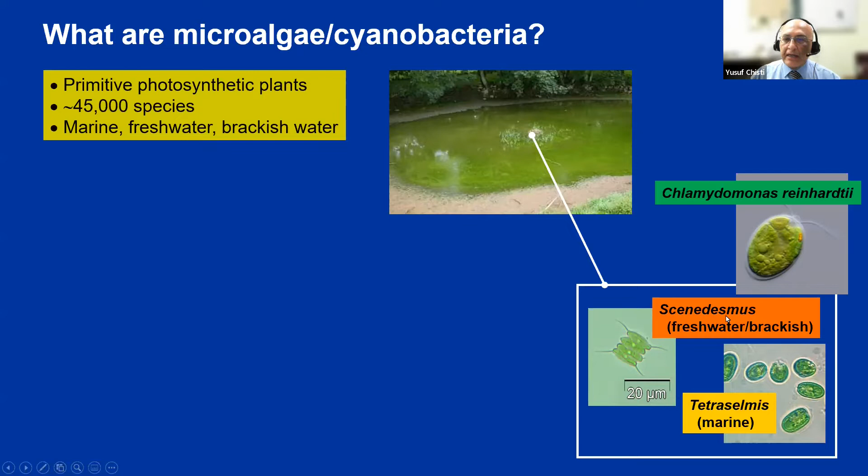What they would look like if you magnified them under a microscope, you could have species such as this. The order of size could be maybe 20 micrometers, an alga called Scenedesmus, or you could have even less, a quarter of this. So quite small organisms that can be different, many different kinds.

So these are the microalgae that we're going to use to treat our wastewater. Now, I'd like to point out that there is something else called macroalgae. These are large algae or seaweeds, large plants that are used in industrial processes and as food, very delicious foods actually. But this is not what I'm going to talk about because it's not used in wastewater treatment. We are talking about microalgae, distinct from macro, or seaweeds.

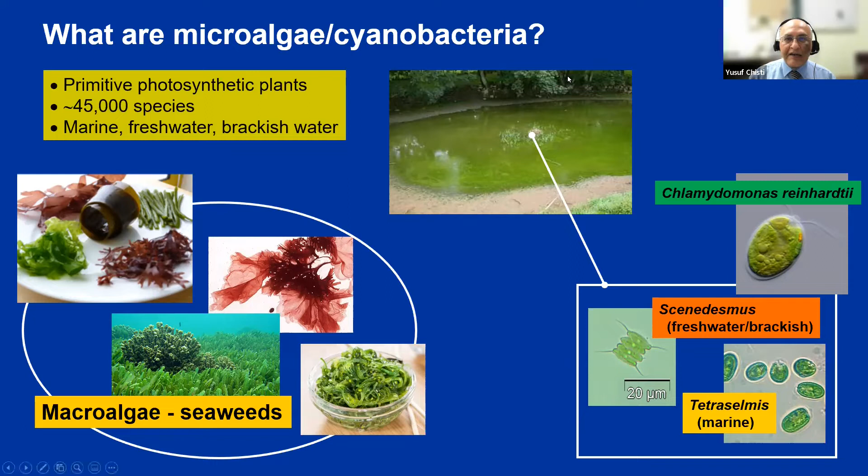Now, just as you see here, you have a pond in which the algae are growing. For use in treating wastewater with algae, you'll need some kind of pond system, typically like this. You have a pond which is quite shallow, a whole bunch of ponds shown here. These ponds are very shallow, and laid out over a large area, meaning they have a high surface area to volume ratio. We'll look at some of the specific numbers.

The reason they have to have a high surface area is that this treatment process is driven by sunlight, and absorption of sunlight depends on the surface area available to you. These ponds are known as raceway ponds because they're shaped like a racetrack, a horse racetrack if you like. Or they are also known as high rate algal ponds, HRAP, high rate because the rate of oxidation of the organic matter in these ponds tends to be rather high. They're also known as Oswald ponds, after the inventor William J. Oswald. They were first invented in the 1960s.

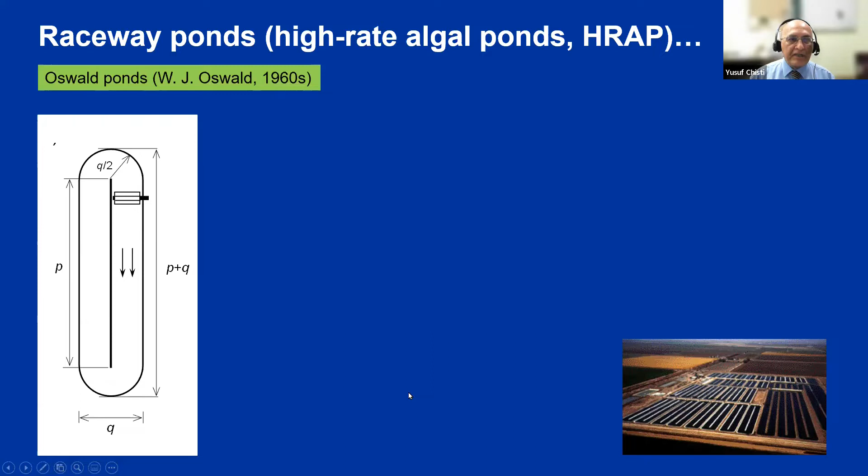The pond could have a shape like this, or it could have a somewhat different configuration such as this. It's the same pond. You have a paddle wheel that rotates continuously, driving the liquid wastewater to flow around. You have the same continuous loop, the paddle wheel driving the flow, and these are baffles to direct the flow right around this channel and back to the start of the paddle wheel. Your wastewater, the feed, enters here somewhere in front of the paddle wheel, and after the entire loop is complete, your treated water is taken out here as the harvest.

The depth of these ponds is very small, only 25 to 30 centimeters, quite shallow, because sunlight doesn't penetrate too deep in this green liquid, so there's no point having a deeper pond than 25 centimeters. They have a high surface to volume ratio, much higher than you'd find in conventional treatment processes, because you're trying to maximize the area to capture sunlight, which drives the photosynthesis carried out by the algae. We'll see why we require that.

A single pond, either of this kind or this, would have an area of up to 2.5 hectares, which is quite large, but more commonly the area is around 0.5 hectares. This configuration shown here corresponds to something similar to this. So this is what an algae treatment pond looks like.

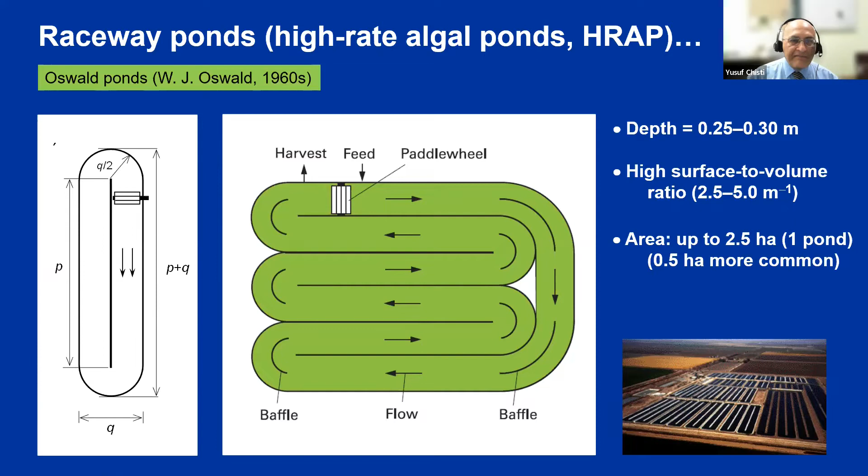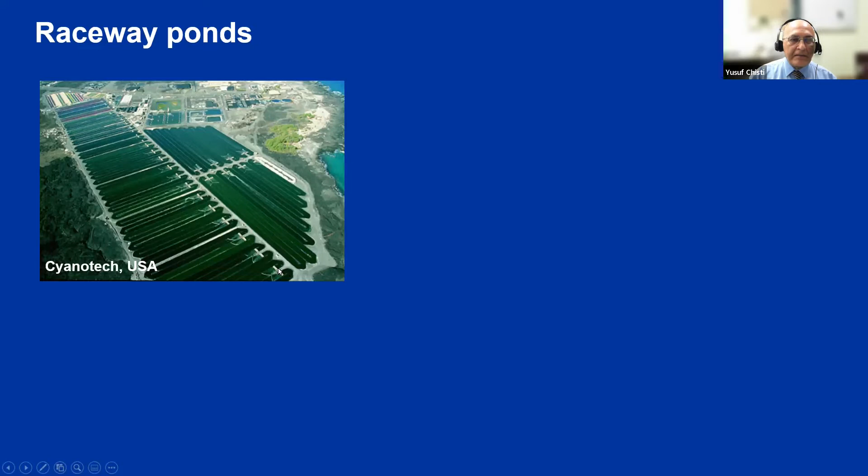Now let's have a look at how some of these might appear in practice. We'll see raceway ponds of this configuration, quite shallow, 25 to 30 centimeters deep. Each pond has a paddle wheel, and this is a whole line of paddle wheels here. If I magnify this, the paddle wheel makes the fluid, the wastewater, circulate. The algae may have a green color, or at some stages of their life, certain algae would acquire a different color, red for example. The paddle wheel runs continuously day and night, 24 hour operation, so that you have sufficient velocity in this channel to keep the algae suspended.

Algal cells must always be suspended, and the suspension velocity must be such that cells are brought to the surface from the deeper parts of the pool frequently, because the surface is where light is captured. The maximum biomass concentration attainable in this pond at steady state would be of order 0.5 kilogram per cubic meter, so 0.5 gram per liter. Very dilute, even though it looks dark green, the culture is actually very dilute.

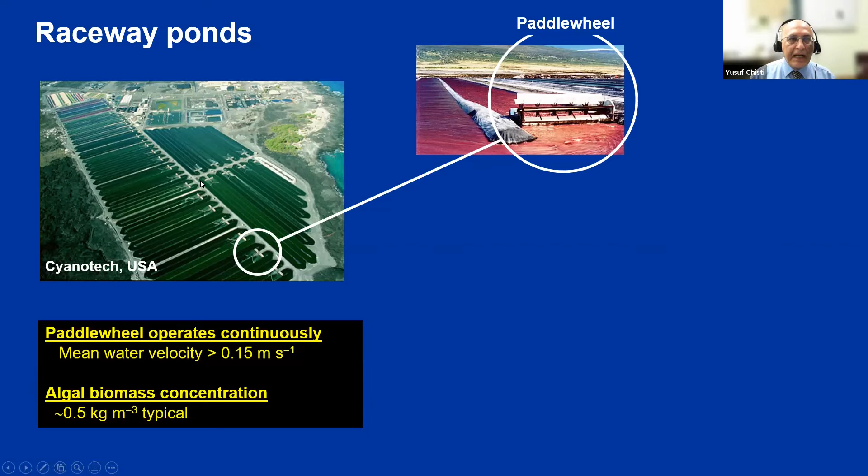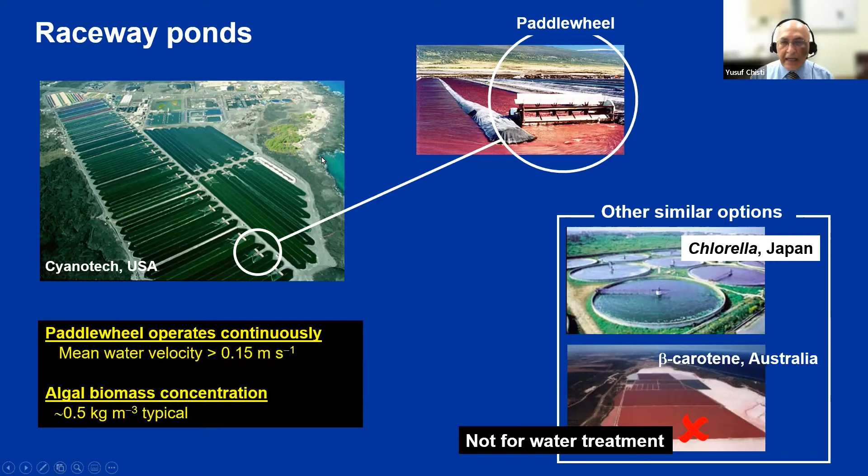Let's now see how an algae-based water treatment facility might look. Generally, the layout of the facility would be something like this. Prior to the algae pond, you have an anaerobic pond that I'll not go into. The anaerobic pond is quite deep, 4 to 5 meters deep, and would have a residence time.

The water entering, the water leaving, the residence time in the pond would be of order 85 to 120 days, so quite a long residence time. The purpose of this pond is simply to sediment all the suspended material that must be removed prior to the wastewater entering the pond.

So the wastewater that enters the algae pond needs to be clear, almost clear, because any suspended solids would interfere with penetration of sunlight into the liquid. That's a limitation we have to live with: the water must be more or less clear before it enters the algae treatment pond.

The BOD loading, BOD5, biochemical oxygen demand, a measure of organic carbon content in the water, can be of the order of 100 to 400 kilogram BOD per hectare of pond area per day. So the treatment can be quite heavily loaded, and the residence time in this pond tends to be only 7 to 11 days, unlike the 85 to 120 days in the anaerobic pond.

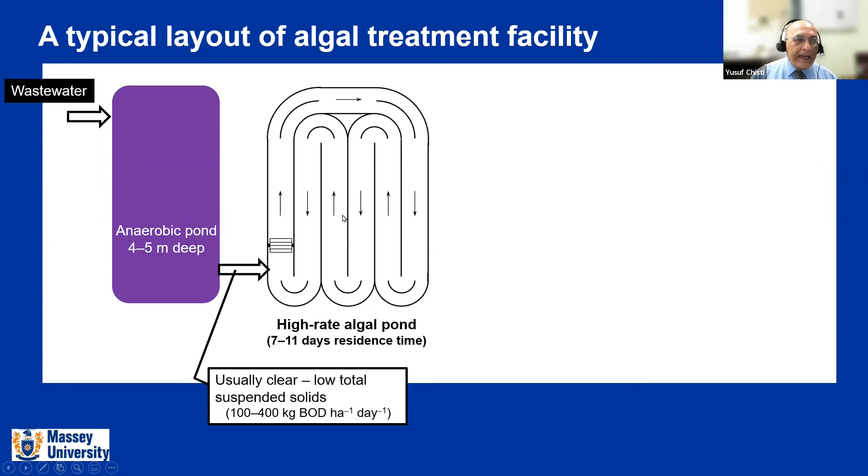So this is what we are concerned about, this is what we'll focus on. Once you have had a residence time of 7 to 11 days, the next component of the process is shown here: you have the algal slurry, algal suspension leaving. This contains the treated wastewater plus the algae cells, a green suspension. You somehow need to remove the algae.

How you do that typically is you have a mixing tank in which you add a flocculant, usually aluminum sulfate. You mix the suspension with the flocculant quite rapidly, dispersing it in the fluid, then go into a second tank where there is gentle mixing. It's important to have gentle mixing, and we'll explain how this flocculation process works.

Once the algae cells have been flocculated, they go into a settling vessel or sedimentation tank where the algae flocs settle and the clear water is taken out. This algae slurry is a concentrated slurry of algae, but quite liquidy. This goes to a filtration or centrifugation process in which more water is removed and we are left with algal paste. So the outcome is two valuable streams.

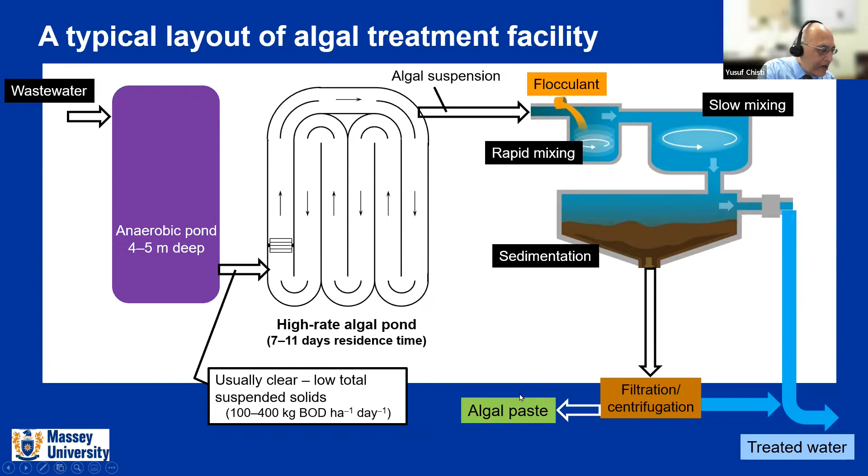Of course, you have the treated water, which is your primary objective, but you also have a lot of algal paste, which is important for this process because it's an important economic contribution. Let's look at how exactly the process in this pond works: how is the biological waste degraded?

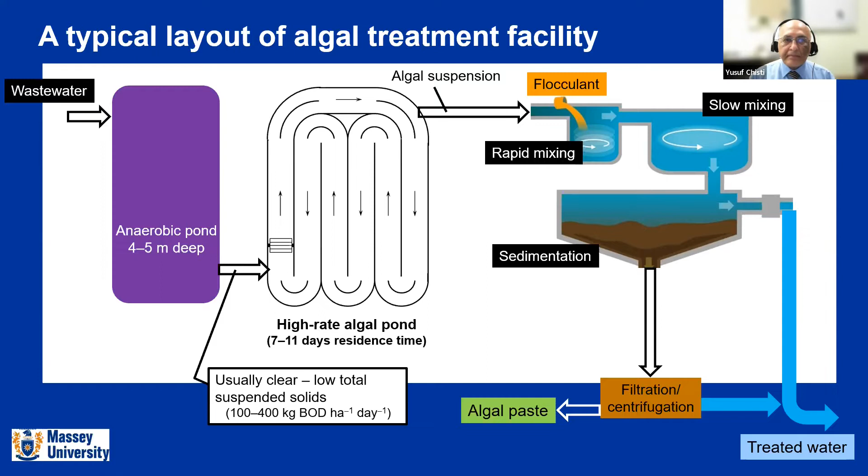So the treatment is actually carried out by a mixed culture, a consortium of algae and bacteria. People often forget to talk about bacteria, but bacteria are present in the pond, and these two interact together in order to achieve the treatment.

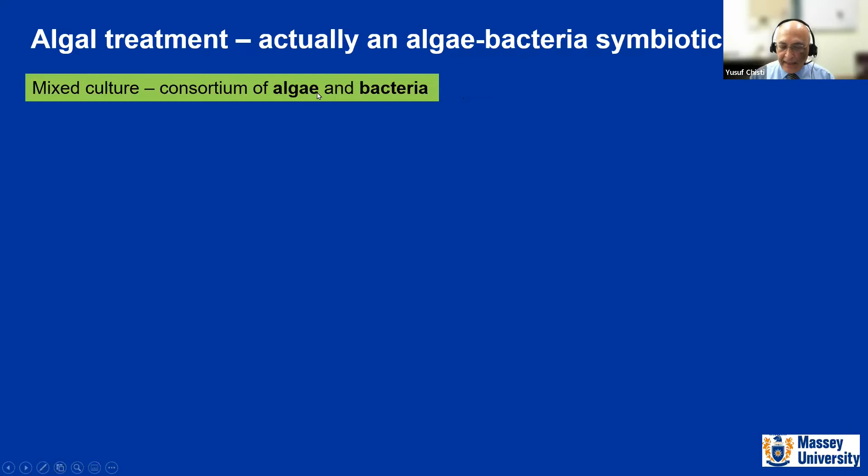So if we look at this algae pond, this is the wastewater going in, with the chemical oxygen demand, COD, organic matter, nitrogen, and phosphorus. This is our pond. It contains microalgae and bacteria. What actually happens is the organic matter, COD, is oxidized by bacteria

using oxygen that is produced within this pond by photosynthesis by microalgae. So unlike conventional activated sludge process where you bubble a lot of oxygen, you don't provide any oxygen here, all the oxygen in the pond is generated in situ by microalgae. This oxygen is used by bacteria to oxidize COD to produce carbon dioxide. This carbon dioxide is used by algae.

Photosynthesis requires carbon dioxide, nitrogen, phosphorus that the algae absorb. And of course, it requires sunlight to produce oxygen. So this is how the process works. Of course,

this process, sunlight is there only during daytime. So oxygen production can occur only during daytime. So this operation, degradation using a combination of algae and bacteria, works only during sunlight. So algae use carbon dioxide and sunlight to produce oxygen by photosynthesis.

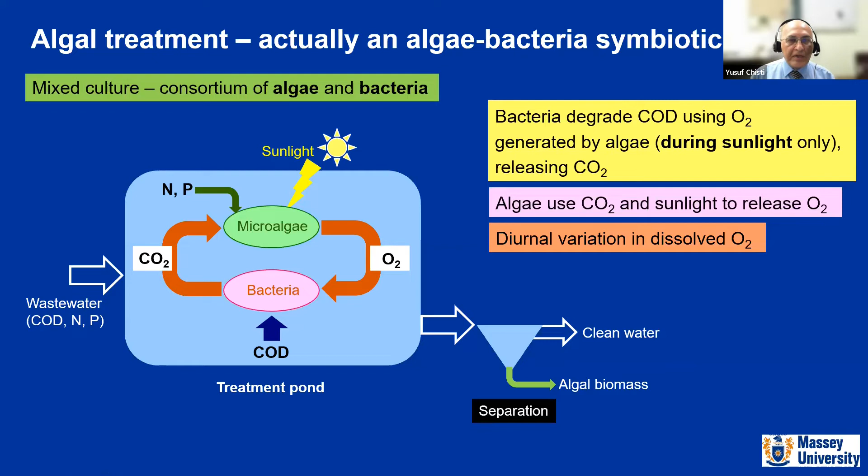During night, bacteria keep producing carbon dioxide, although they don't have oxygen. We'll see that derives oxygen from a different source, and the pond tends to become acidic. So of course, in such a large pond, you cannot control pH, and we don't control it, but there is a pH variation, and it's important to recognize this because it has important implications.

So if we plot the pH of the pond water against time, at sunrise, the pH is around 8. At solar noon, when there's a lot of sunlight, the photosynthesis is occurring rapidly. Carbon dioxide is being consumed. Carbon dioxide produced by bacteria is consumed by the algae. Concentration of carbon dioxide in the pond declines and the pH rises. It could rise to as high as 9 or even higher, 10.

So this pH change occurs, and there are two mechanisms for it. One is, of course, your bicarbonate and H plus hydronium ion combine to give you carbonic acid that splits into carbon dioxide and water. Carbon dioxide is consumed by the algae, so that results in a net consumption of H plus and alkalinity increasing. And this mechanism tends to dominate at pH around 8 or less than 8, early in the morning, late at night, late in the evening.

There is a second mechanism that also operates in relation to pH, and that is your HCO3 bicarbonate being split into carbon dioxide and alkali. So this CO2 is consumed by the algae during daytime, and OH concentration increases, therefore the pH increases. This mechanism tends to dominate at higher pH values, greater than 10. Both mechanisms operate, but which is dominant varies with the pH situation. And this effect is important for treatment, and we'll see how it helps with the treatment.

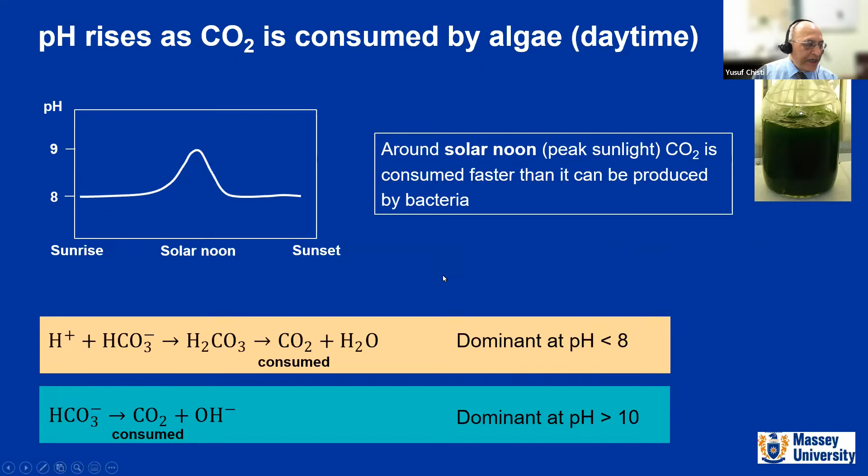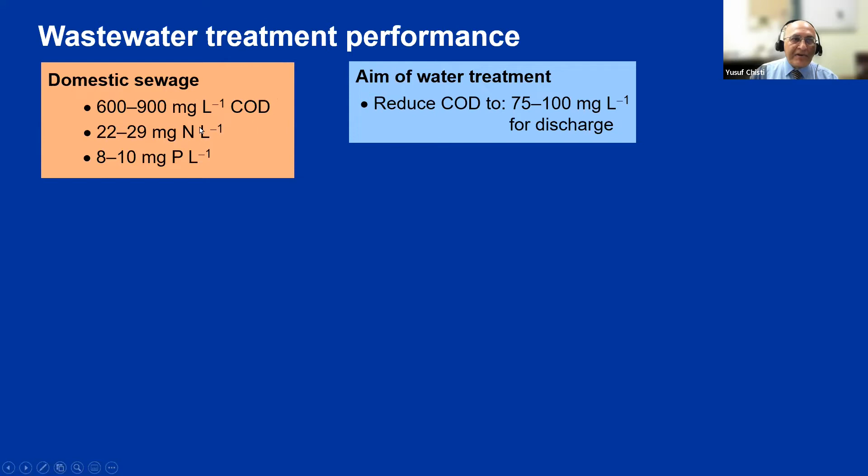The aim of the treatment, whenever you're treating domestic sewage, your primary aim is to reduce chemical oxygen demand from around 600 to 900 to maybe 75 to 100 milligrams per liter. At this point, this water is ready to be discharged to a natural environment. So the purpose of the treatment is to change primarily the COD level from this level to that level.

Let us see how effective the algal process is in achieving these aims. So algal treatment will remove COD from this level by 90%. That means if you remove 90% of the COD, you will come down to this level of chemical oxygen demand remaining. That means you're able to treat wastewater using an algal pond in terms of your objective of reducing COD. That can be done, no problem.

The algal process also removes nitrogen and phosphorus. How much is removed depends on the operating conditions. Operating conditions, we can't really control too much.

Operating conditions mean the temperature, and temperature is what it is out there. So in a warmer climate, removal rate would be different than in a colder climate. It also depends on the sunlight level, because sunlight levels are different in different geographical regions, whether you are at the equator or further away from it.

Overall though, in general, you'll be able to remove 80 to 90% of nitrogen present in the wastewater. It's important to understand that around 45% of the nitrogen removal is not due to algae, but due to stripping of nitrogen from the surface of the pond. We'll see how exactly this mechanism works, but just remember that around 45% nitrogen is removed by stripping.

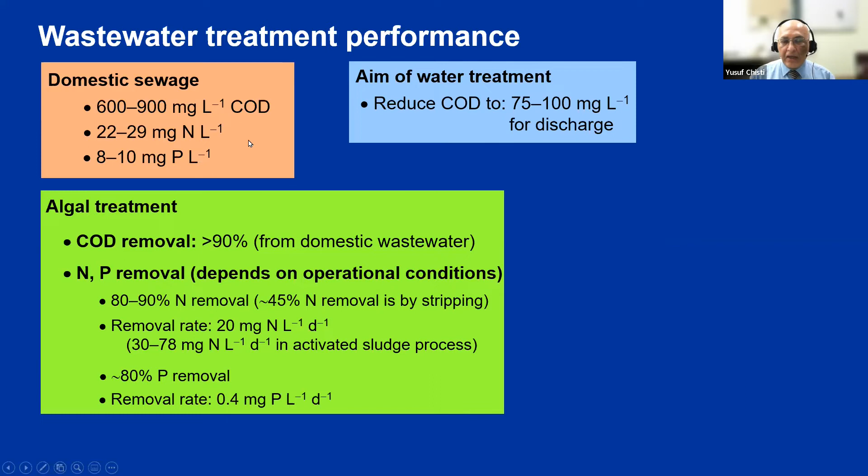Another important aspect of treatment is that from domestic sewage, you want to remove pathogenic bacteria, E. coli for example, or coliform bacteria as we call them. How effective is the algae process in removing coliform? 90 to 99% of the coliform in the clarified sewage would be removed by the algae process.

The mechanism is that in the pond during daytime, there's high oxygen. High oxygen in combination with high sunlight level tends to create oxidizing radicals that damage these coliform bacteria. Also, during midday, pH tends to be high, 9 to 10, and many coliforms are susceptible to pH, so they'll be destroyed by the alkaline pH. These are the mechanisms responsible for removal of coliforms.

Now let's see how nitrogen removal by stripping works. 55% of nitrogen is removed by algae, but the rest is removed by stripping. What exactly is this?

One thing to note is that the wastewater you're using must be free of toxins and heavy metals. If you have toxins or heavy metals in the wastewater, then the algae biomass produced cannot be used; the only thing you could do with it is use it as landfill. So your water must be clean of toxics and heavy metals so that the algae produced can actually be put to proper use.

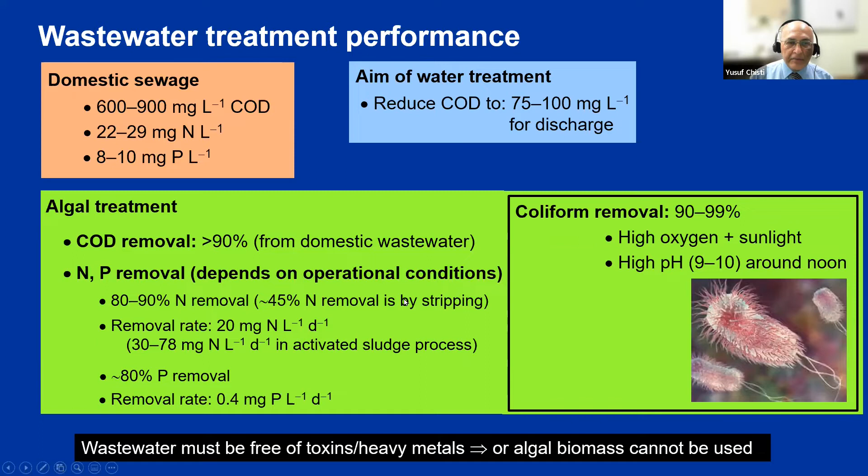Okay, let's go on to see how nitrogen is removed by stripping. There are two mechanisms of nitrogen removal by stripping. One is that in water, nitrogen, when it's in the form of ammonium, is actually in equilibrium between ammonium form and ammonia, NH3. Depending on pH, say pH 9, 24 degrees Celsius under common operating conditions, 35% of the nitrogen will be unionized, so it'll be in this form.

If the pH is higher, at 10, nearly 84% of the total nitrogen would be in this unionized form. So depending on pH, the more alkaline it is, the more of the nitrogen will be in this form, and that will tend to volatilize or evaporate from the surface of the pond.

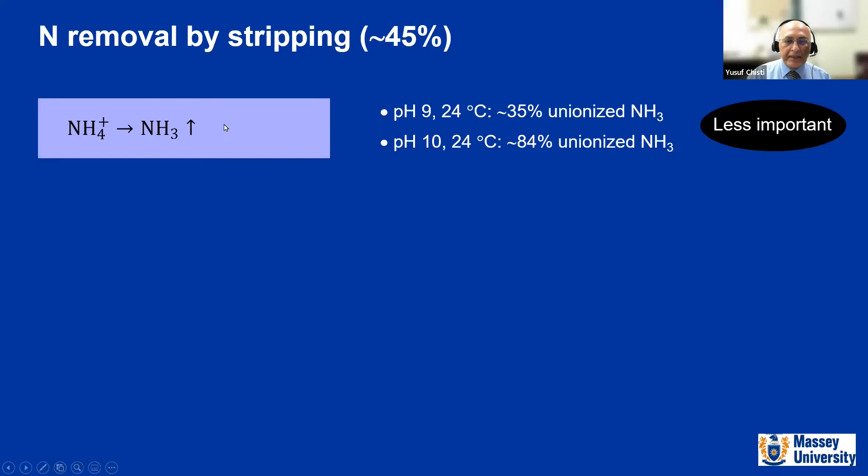So part of the nitrogen removal is due to this mechanism, although this mechanism is not very important. There is a second mechanism that is much more important.

And that is denitrification. You see, during the day, the conditions in the pond are aerobic, highly oxygen rich. But during night, there's no production of oxygen. The conditions become anaerobic at night, and that's when the denitrification occurs.

Most of the nitrogen present at the end of the day is in the form of nitrate. This nitrate contains oxygen. Bacteria extract this oxygen, converting nitrate to nitrite, and extract this oxygen, converting nitrite to nitrogen. This nitrogen leaves through the surface of the pond. So at night, because bacteria don't have access to oxygen, they use oxygen in nitrate and nitrite to oxidize the organic matter. This is how nearly 45% of nitrogen is removed from the water.

Now, in the field, we can't do many experiments because they are very difficult to do. So we do a lot of experimental work on algal ponds in the lab. In our labs, the ponds look like this. This is a raceway pond. It's also 30 centimeters deep, just as a full-scale raceway pond. It has a paddle wheel the same size as in a typical raceway pond, same diameter.

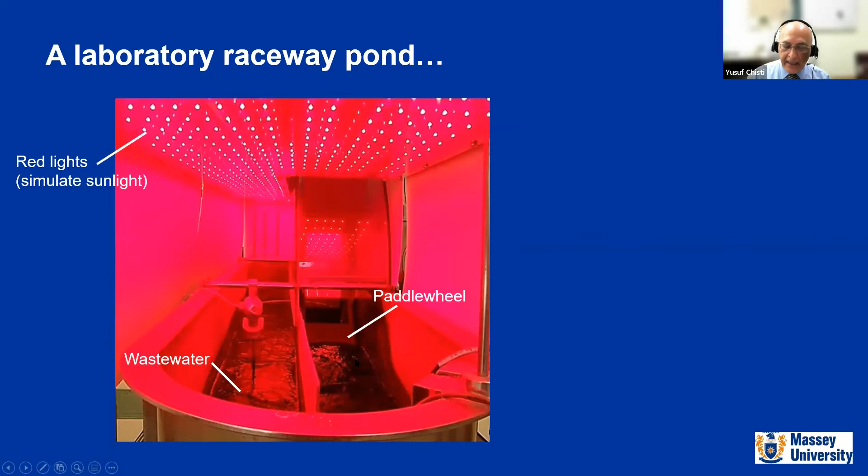Of course, this wastewater will have to be inoculated with some algae to start the process, and we grow the algae in small culture bottles. This becomes our seed, which is added to the water to provide the algae.

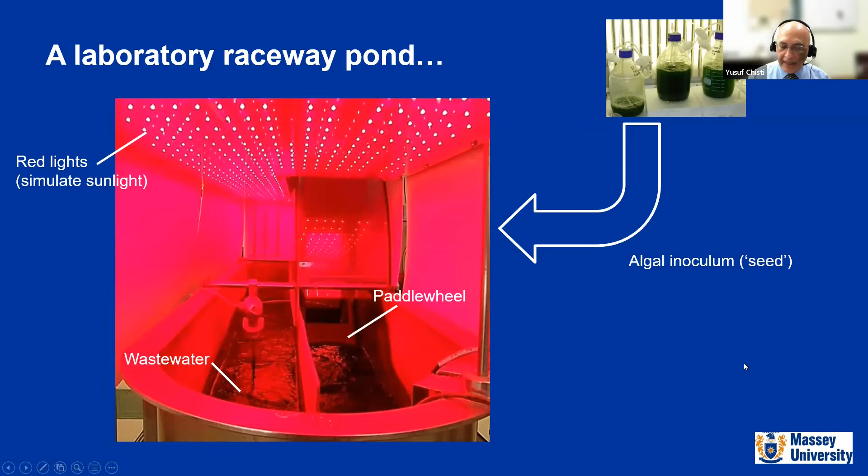Now let's compare algal treatment with the conventional activated sludge wastewater treatment process. The conventional process you're of course quite familiar with. It's well established. That's how municipal wastewater is treated all over the world, by the activated sludge process.

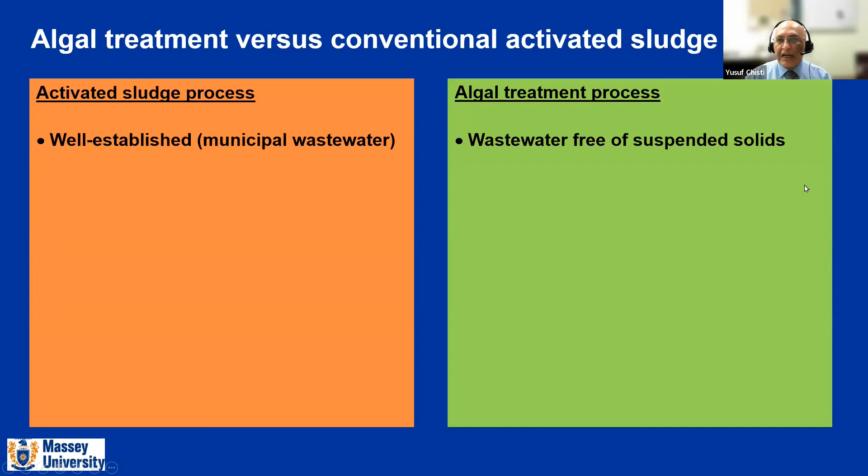In the algae process, the water needs to be free of suspended solids, as I explained, because they interfere with penetration of light in the algal pond. The thing with the activated sludge process, and that's its disadvantage, is that it's very energy intensive. It requires a lot of energy to provide aeration and mixing. In fact, 50% of the total cost of treating water by activated sludge process is actually the cost of energy, providing aeration and oxygen. In the algae process, sunlight and the algae provide the oxygen, so this cost is minimized.

With activated sludge, most of the nitrogen and phosphorus remains in the effluent unless you use tertiary treatment. Here, our energy cost is much lower, 50% of the cost, and that's the main advantage of reducing the cost of treatment.

The other thing, of course, is that for an algae operation, the wastewater must contain carbon, nitrogen, phosphorus in a certain ratio, which generally is what happens. So if the wastewater is short of carbon, you'll need to provide carbon dioxide. Generally we don't need to do that, but this is something to keep in mind. If you don't have sufficient carbon, your nitrogen and phosphorus will not be removed completely, because there isn't sufficient carbon to grow the algae biomass.

We have seen that some of the nitrogen is removed by volatilization, and some goes and is captured by the algae biomass, and all phosphorus is captured by the algae biomass as well. If you have too much nitrogen, you cannot remove it unless you also provide phosphorus, because there has to be a certain nitrogen-to-phosphorus ratio, and that's the ratio you get in the algae biomass.

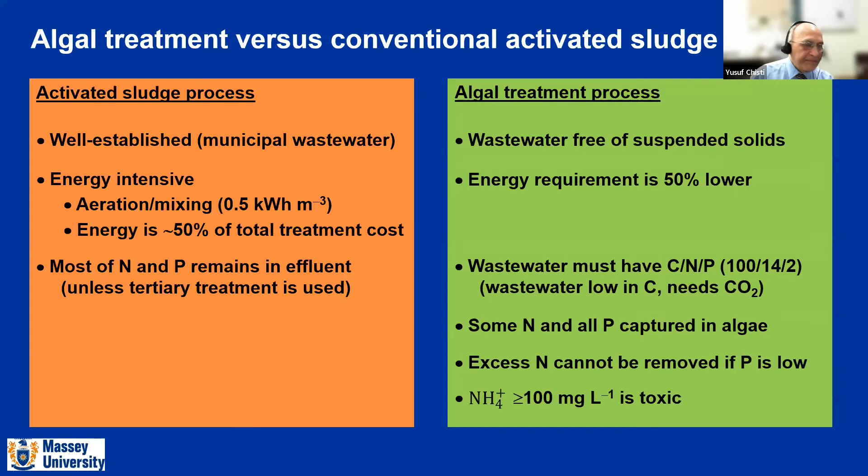Another important consideration: for the activated sludge conventional process, a facility around 1 hectare in area is sufficient to treat effluent from a fairly decent sized town, say 40,000 people population. Now, if you were to treat effluent from the same number of people using the algae process, you'd require 30 hectares, which is completely unrealistic.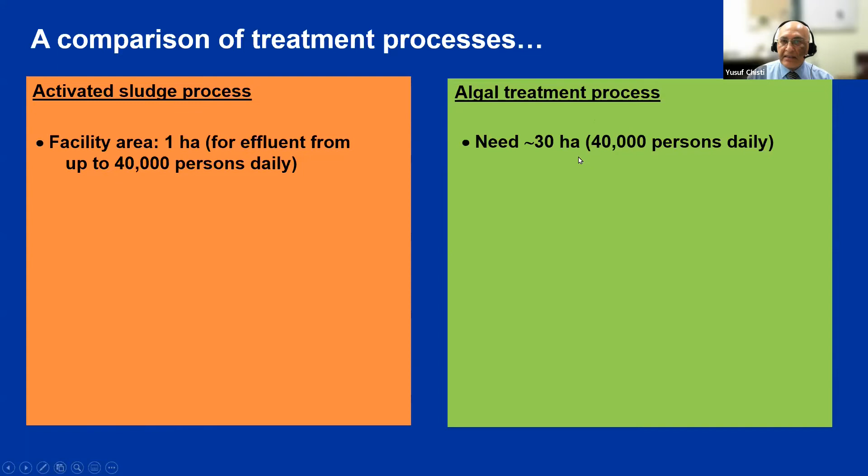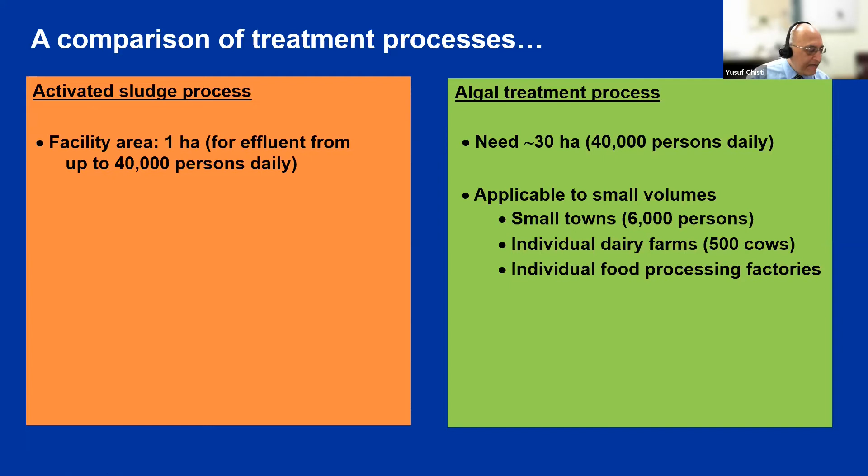So that means that algae process is applicable only to small towns, maybe 6,000 persons would be the limit. It's applicable to individual facilities, such as an individual dairy farm with maybe 500 to 1,000 cows - you could treat the effluent from this using an algae treatment process. You could treat effluent from individual food processing factories, etc. So there's a limitation to size.

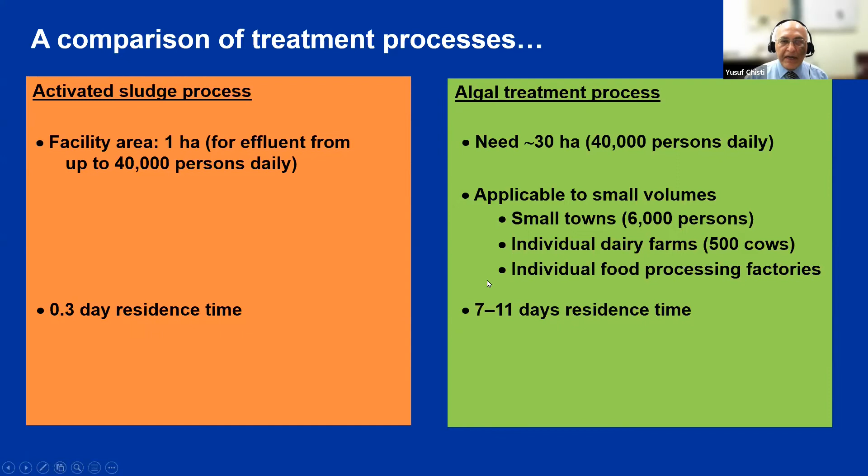Here, the residence time is very short. Activated sludge process, 0.3 days. In algal treatment, you require a longer residence time. And the outcomes, of course, are different.

You have treated wastewater in both cases. Here you have a lot of nitrogen and phosphorus remaining unless you use tertiary treatment. Here, most of the nitrogen and phosphorus would be removed by the algal biomass. In addition to the treated wastewater, your product is algal biomass, and this is an important product. Here, the product is activated sludge that you can only use more or less to produce methane, which is a low-value product by anaerobic digestion.

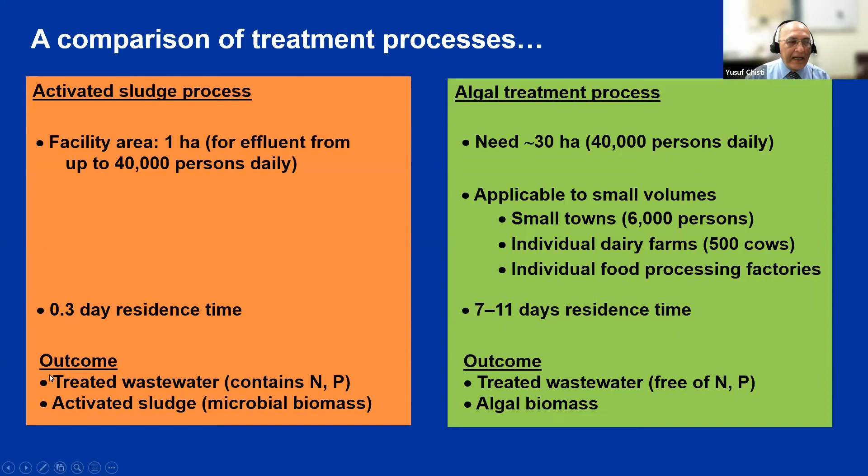So while these are the comparison differences, once you have grown the algae, you must separate the green cells from the water, and that's typically done by flocculation, which is a two-three step process. In the first step, you take the algal broth coming out of your raceway pond, you add the flocculant, mix it rapidly, then continue mixing, but gently.

It's important to see the differentiation. Gentle mixing allows the algae flocs to contact with each other, but the mixing is not so intense as to break the flocs apart. So this gentle mixing is important to increase floc size.

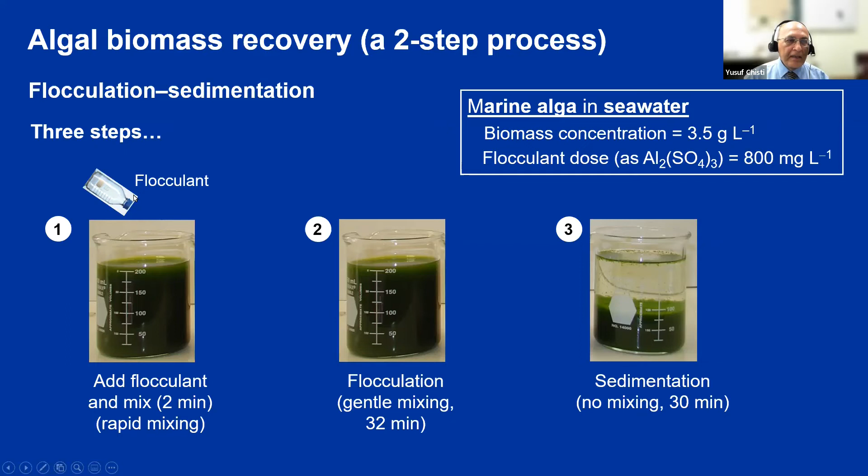Once you have done that for a certain amount of time, 32 minutes in this case, you stop mixing completely, and you let the algae flocs settle - they'll settle like this in about 30 minutes. So you've gone from there to there. Here, they will never settle, they will just stay like that. The point is that this slurry has a lot of water, quite a lot of water, and will require further treatment to remove this water, and we'll see that.

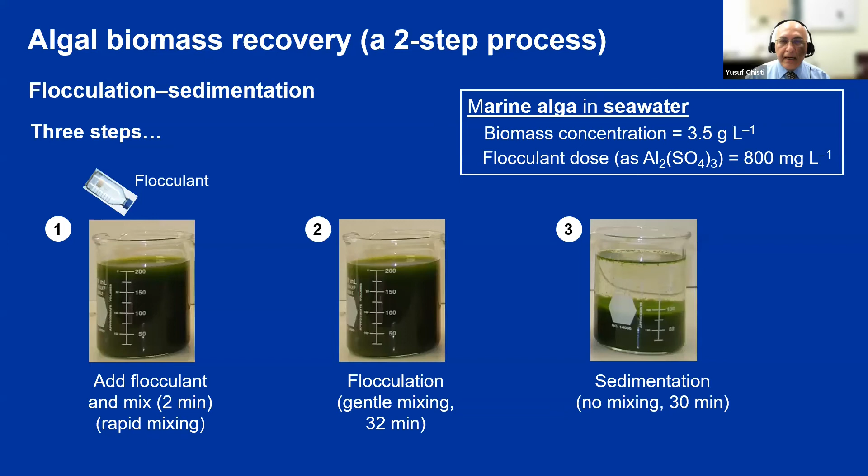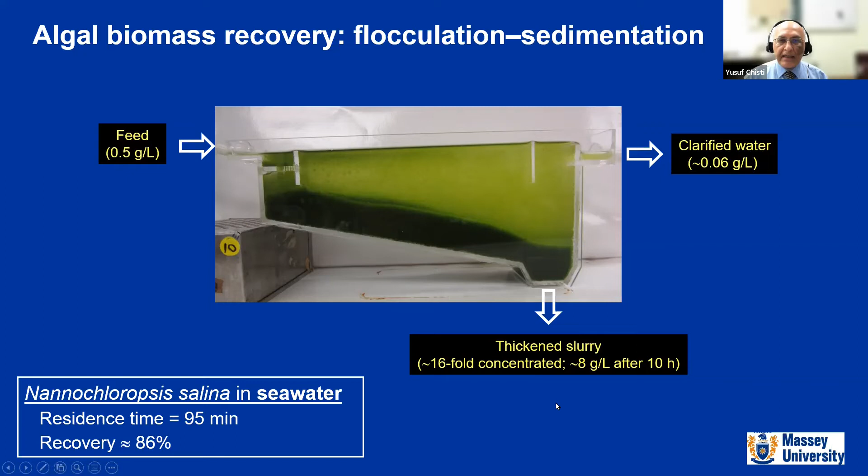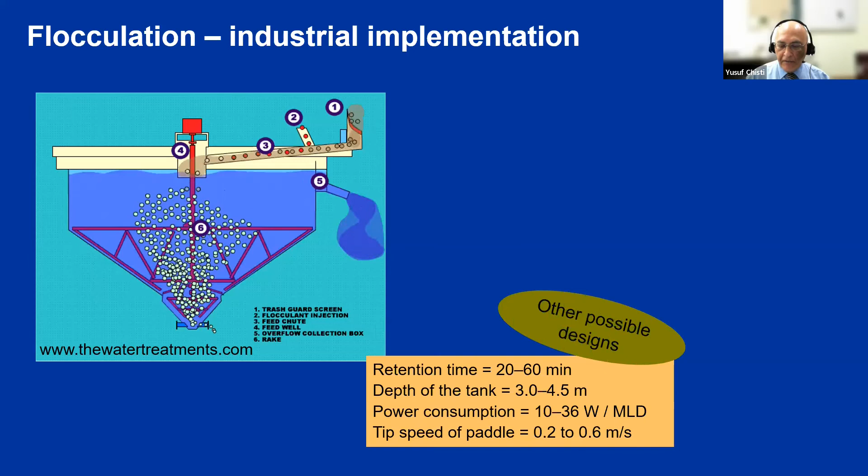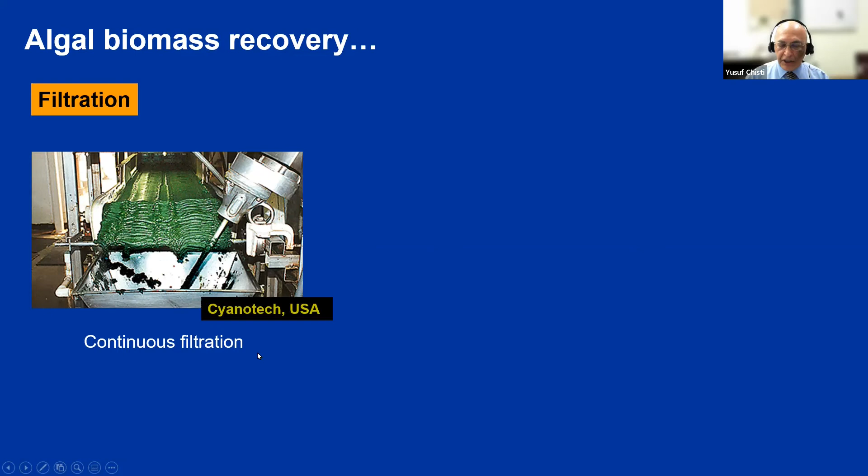So you've gone from this to this. You need to separate the water, then take this and treat it further to recover the biomass, either by filtration, because biomass is an important product of the whole process - and if you're not intending to produce the biomass, there is no point for the algal treatment in the first place. You could use filtration, a belt filter, a Dacron cloth, gravity suction filtration, or you could use centrifugation - large industrial centrifuges, not a very high G, just 3000 G force - and you'll get a paste like that.

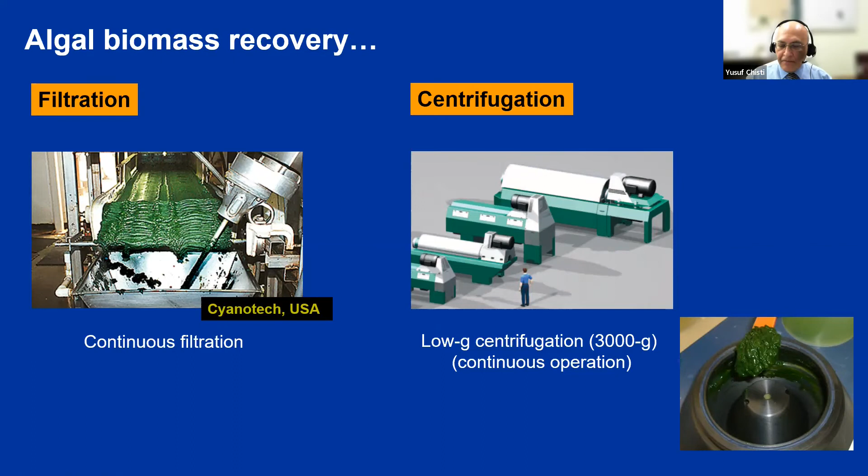Now, algae, of course, are used in many applications. You could use them to fertilize your fields, to provide nitrogen, phosphorus rich fertilizers. They're used in certain animal feeds - the biomass may be too expensive to feed to large animals, but a small amount is used in fish feed and poultry feed because of the characteristic of the biomass in relation to the color of chicken eggs, for example, and the color of fish flesh. So using animal feeds, using human food to some extent - we'll see if you can produce it cleanly without any contamination.

You can use algae to extract things like polyunsaturated fatty acids that are important in human health and brain development. Brain cells need certain kinds of fats that you have to have in your diet. You can also use algal biomass to produce beta carotene.

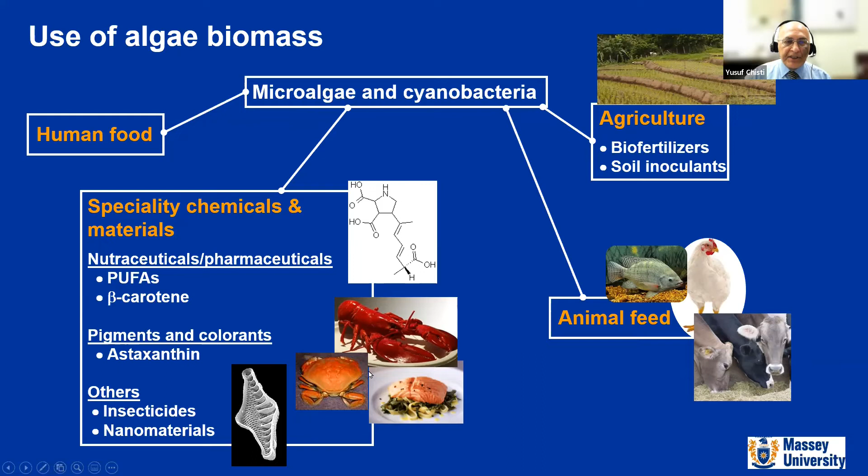This is the orange color found in carrots, commercially produced by certain algae. You can also use algae to produce astaxanthin, the red color you find in salmon, lobsters, and crabs.

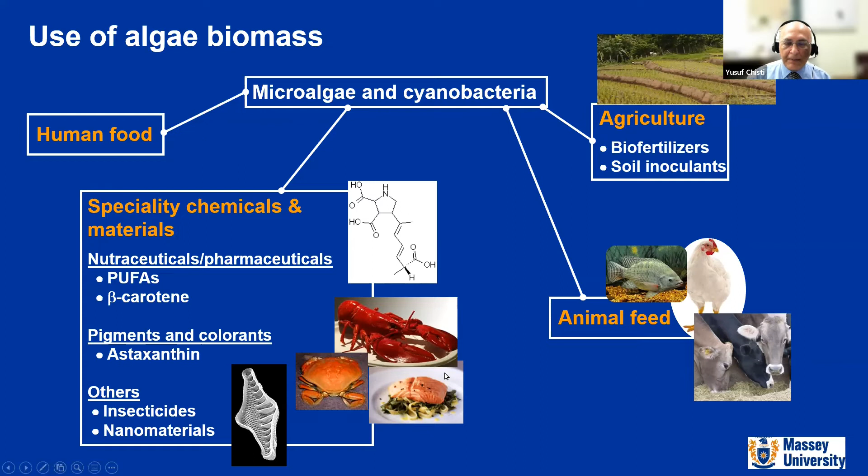Once they place the algae slurry here, the water soaks into the sand and the algae is left on top. The water soaks in and you'll have a layer of algae, which is allowed to dry for just a few minutes.

It's still a wet cake, and you can cut it off and peel it off the surface, then dry it further. It's sold in the market and used as food.

Nearly 250 tons is produced in this region alone, which is 10% of global production. You have 90% being produced other places, including commercial production in the United States, China, and various other places of this cyanobacterium for human consumption.

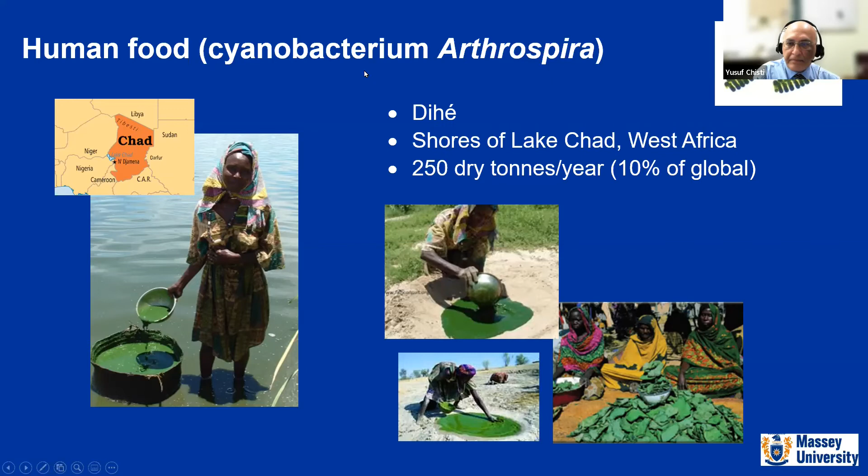Of course, you can use algae in certain aquaculture. Aquaculture is production of seafood by farming. Nearly 50% of the seafood is produced by aquaculture, so it's produced by farming, not by being caught in the sea. There's not enough supply in the sea for wild catch.

And the seafood I'm talking about are these shrimps, lobsters, shellfish, and salmon. 70% of the salmon is actually produced by aquaculture.

Production of this kind of seafood requires algae, because these animals need to be fed, and algae tends to be an important component of their feed at a certain stage of the life cycle.

So you grow the algae, which we call green water. You may take larval shellfish, shellfish spat, add them to the water. They'll filter the water, pumping it through their bodies to take out the algae, leaving clean water, and using the algae for food.

They'll grow to a certain size, and then they'll be planted in the sea, because it's not too cost effective to keep feeding them the algae. They are planted in the sea to use natural algae to feed.

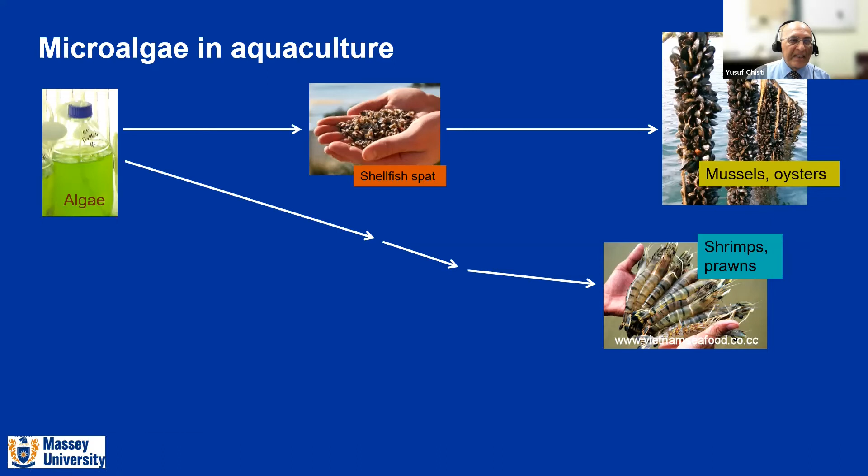These shrimps, at certain early stages, require algae feed, although later stages the shrimp is carnivorous. Certain fish, these fingerlings that we call larval fish, some of them would need to be fed algae biomass.

And some fish, of course, eat live prey. So they eat these very tiny shrimps that are first fed on algae. The shrimps are then grown, then fed to the fish. And then, of course, this is what we get from our aquaculture farms.

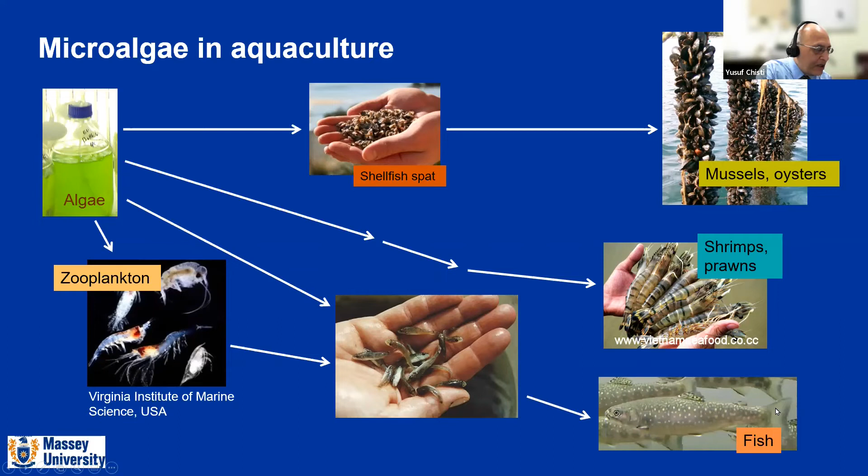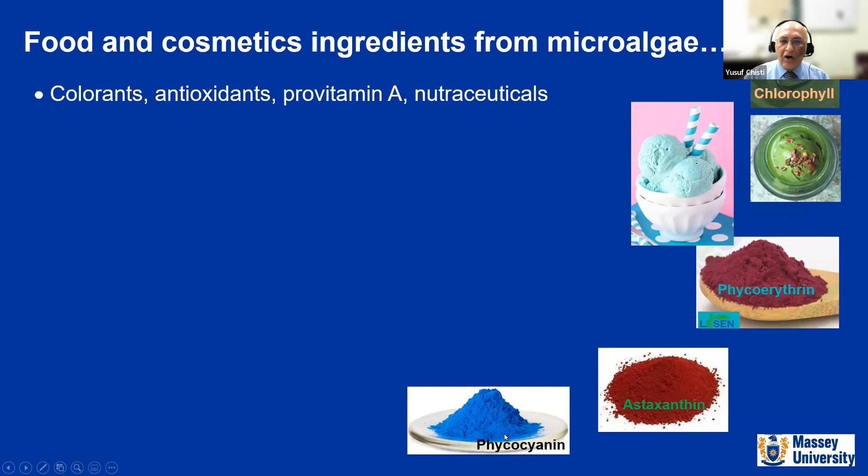Finally, you have many other applications of algae in food and cosmetics. You have all these colors, chlorophyll, phycoerythrin, astaxanthin, they're all produced by algae and used to color various foods, ice creams, and so on.

You get these bottles of chlorella, this red algae, which is actually a macroalgae. Nonetheless, they're used as a source of nutraceuticals.

They're used as human nutrients. You get them in tablets, you get them in powder, you can spray them on your cornflakes, various ways. You have algae biomass being added to chocolates and so on to provide extra nutrients.

You have astaxanthin, added to creams, this is a powerful antioxidant, to provide you with various cosmetics and so on. So these are some of the applications of algae.

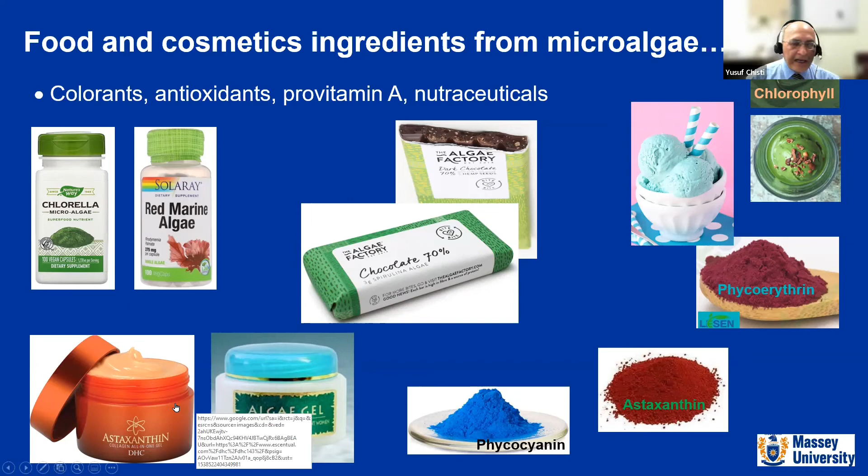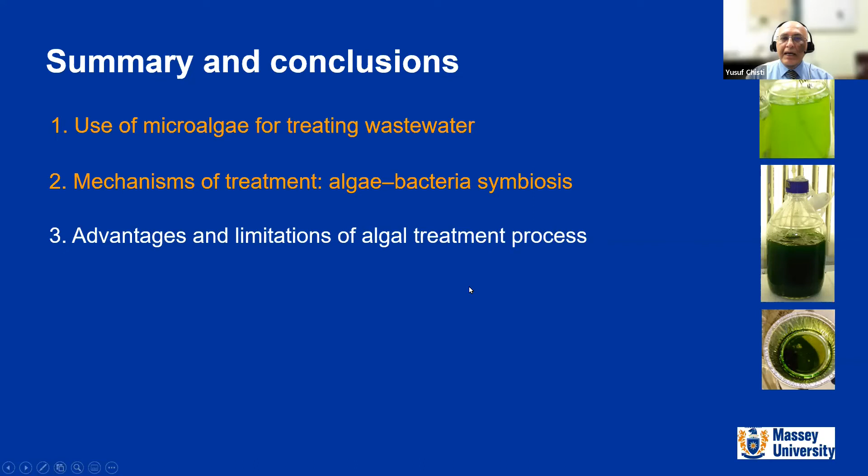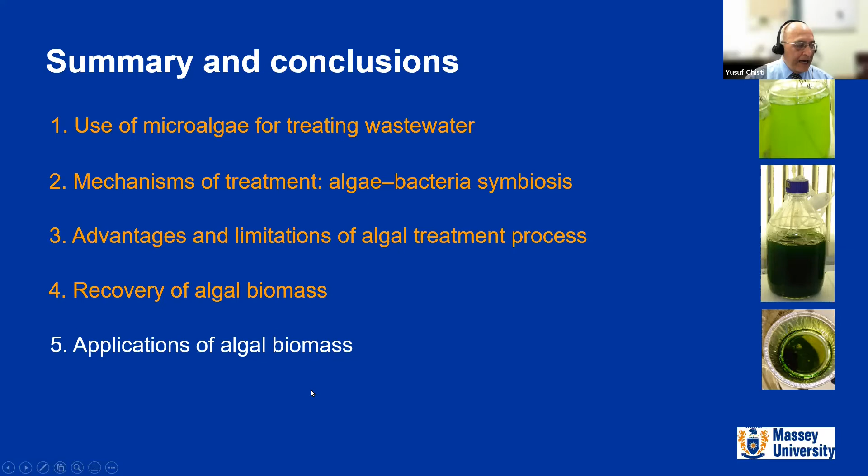So what I have done is I have tried to explain to you how microalgae are used for treating wastewater. I've attempted to explain the mechanism of treatment, how algae and bacteria interact in a symbiotic relationship to treat the wastewater. And we've seen some advantages and limitations of algal treatment compared to conventional activated sludge treatment. And we have seen how algal biomass is recovered at the end of the process and how the algal biomass may be used in certain applications. So this concludes my presentation. Thank you.